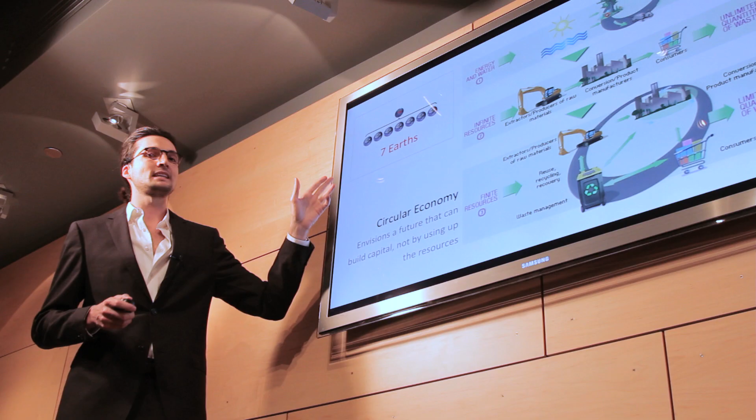Let me explain. We live in a linear economy where we take, we make, we use, and we dispose, creating a lot of waste at the end and taking a lot of natural resources. As a consequence of this model, we would need 7 planet Earths if the whole world were to consume at the same rate as America does today.

So a circular economy system is where things are reused or recycled, so they don't create waste, or at least they don't create as much waste, and in the same way take less resources.

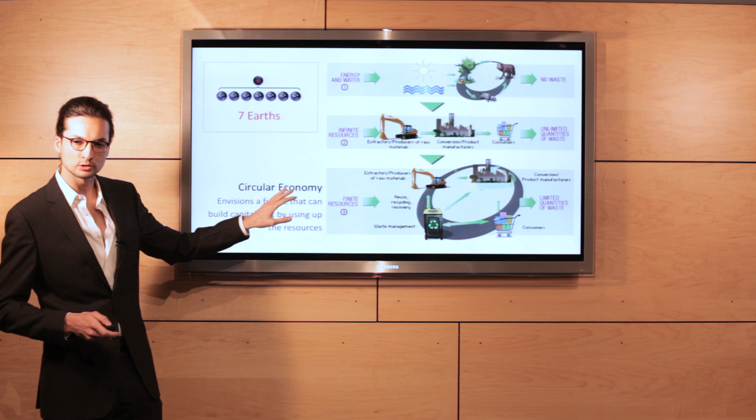A car today already has a high recyclability rate, where 85% of a car is already recyclable. But this is actually downcycled, meaning that every time the materials are recycled, they lose properties until someday they end up in a landfill. The steel out of these cars is not going to be good enough to be used in a car again. It's going to be used to make lower quality products.

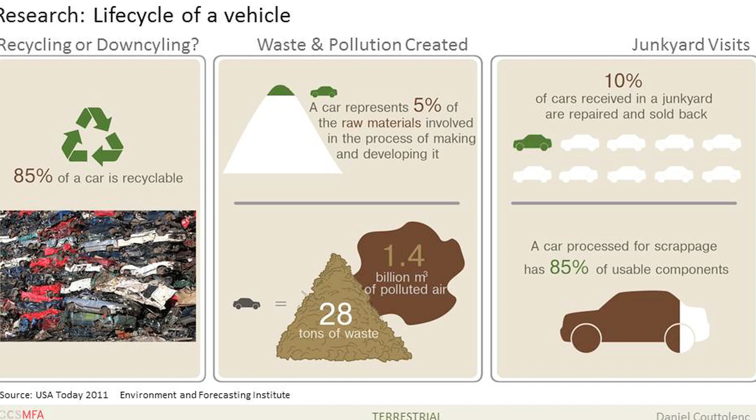Before a car is even put on the market, it has already created huge amounts of waste and pollution. A car represents only 5% of the raw materials involved in the process of making and developing it.

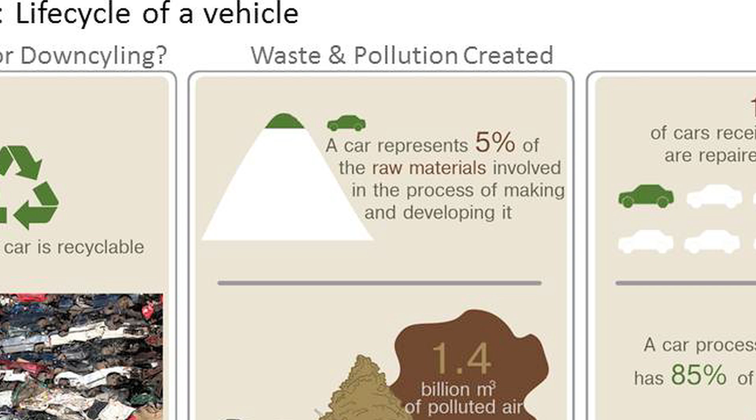To try and understand the end of life of a car, I visited junkyards, where I was impressed by the good condition of these cars. I had never been to a junkyard before, but I had this idea of super old and rusty cars.

But later I found out that 10% of the cars received in the junkyard are repaired and sold back, and out of the ones that stay, they have an average of 85% usable components. But because the car is designed as a whole, the whole car has to be processed for scrappage.

The segment I'm targeting is called the LOHAS, a rapidly growing demographic related to sustainable living. For them, the value of preserving the environment stands higher than the status or the tag price.

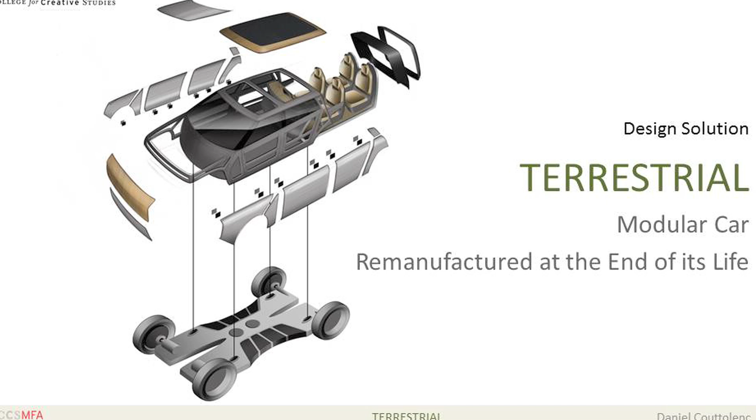My design solution is called Terrestrial. It is a modular car that is going to be remanufactured at the end of its life. My solution is not about the car itself, but about an opportunity to make a more sustainable life cycle.

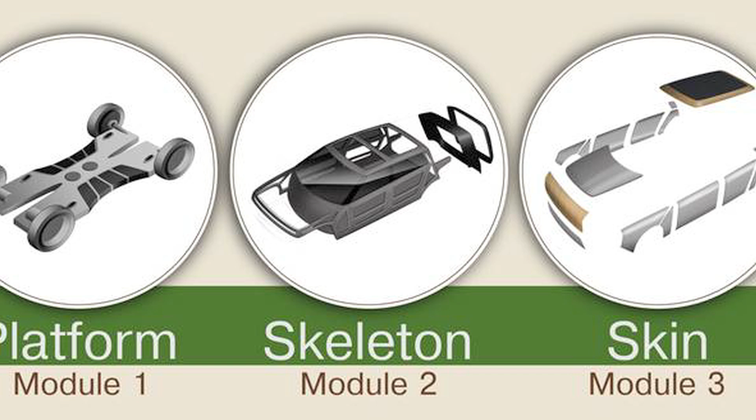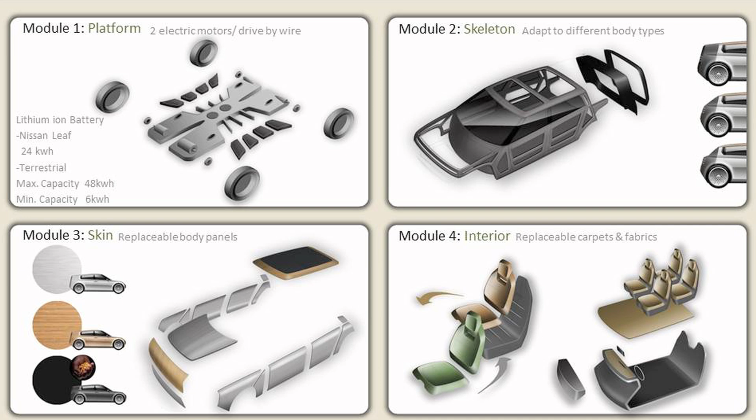Terrestrial is divided into 4 modules. The first module is a platform. The second is a skeleton. The third is the skin, which are the outer body panels, and the fourth is the interior. These 4 modules work independently from one another, being able to be repaired and upgraded to new designs and technologies separately, without limiting the lifespan of one another. Each of these 4 modules is subdivided into modules to maximize the lifespan of each component.

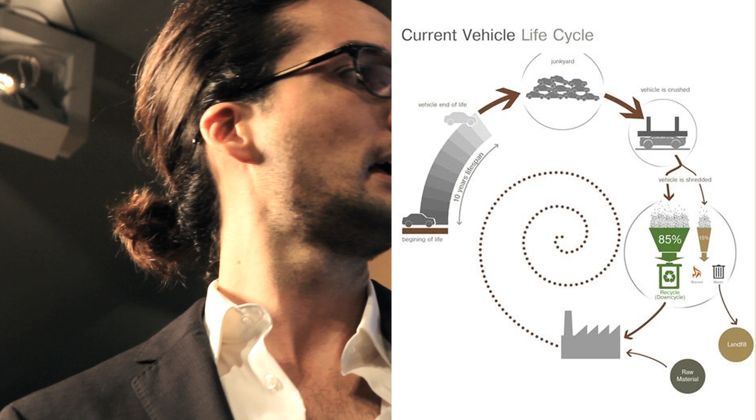This is how the current life cycle of a vehicle works, where at the end of the 10-year average lifespan of the car, it's sent to a junkyard where it's going to be crushed and shredded, and the recycled material, as I mentioned earlier, is not going to be good to use in a car again. So it goes in a spiral until someday it will end up in a landfill.

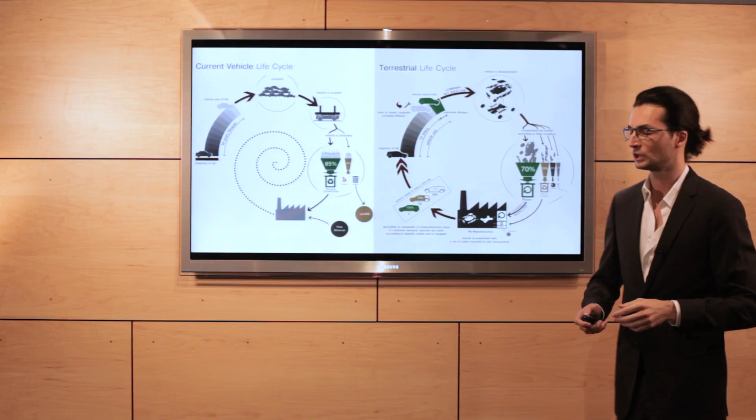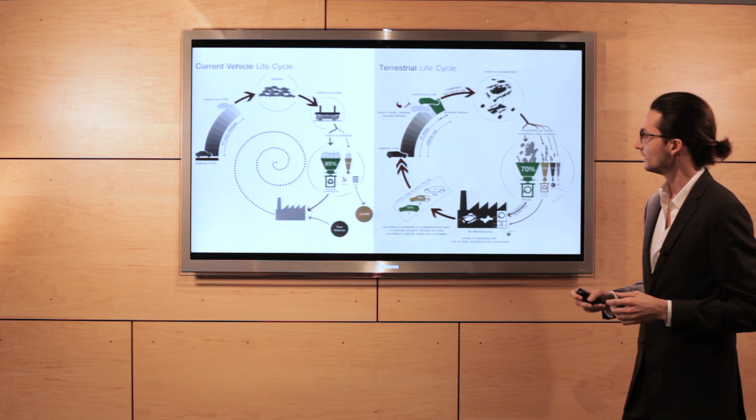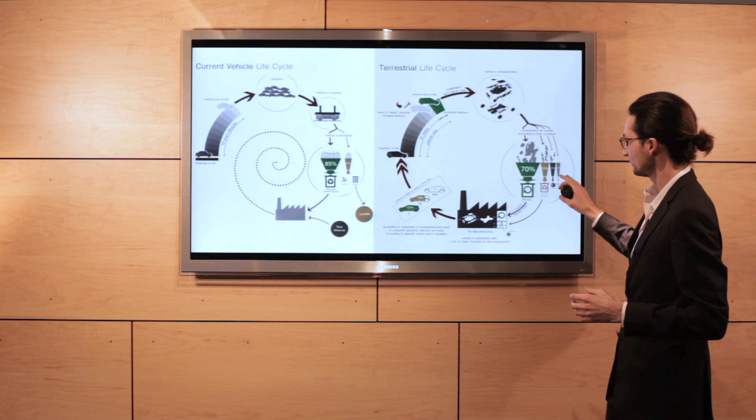This is how the proposed life cycle of terrestrial works, where because the car is designed modularly, it's easy to repair and upgrade, which will expand the lifespan of the car. After, when it finally reaches the end of its life, the company will buy back the car, where the car is going to be disassembled. 70% of components are going to be processed for remanufacturing, and cars are going to be assembled with these remanufactured components. This way, cars will have a second life.

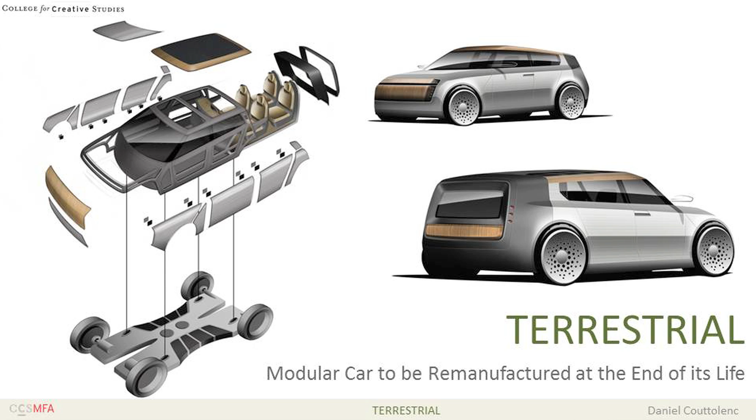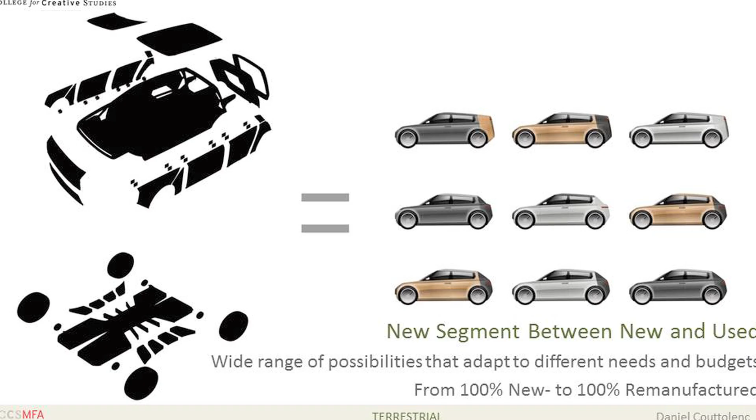This is an exploded view of the 4 modules and how it looks assembled. This will create a new segment between new and used cars, having the reliability of a new car but at a much lower price, having a wide range of possibilities that can adapt to different needs and budgets, having cars that are built with 100% new components and cars that are built with 100% remanufactured components, and all the possibilities in between.

The benefits of terrestrial are an increased lifespan, where in the typical car the average lifespan is 10 years, with terrestrial the average lifespan of components is 30 years, a reduction in waste and pollution up to 1/3, and a high residual value, because in a way the company will be selling several times the same component. At the end of their life, the car will have a high residual value, up to 30% of the initial purchase price.

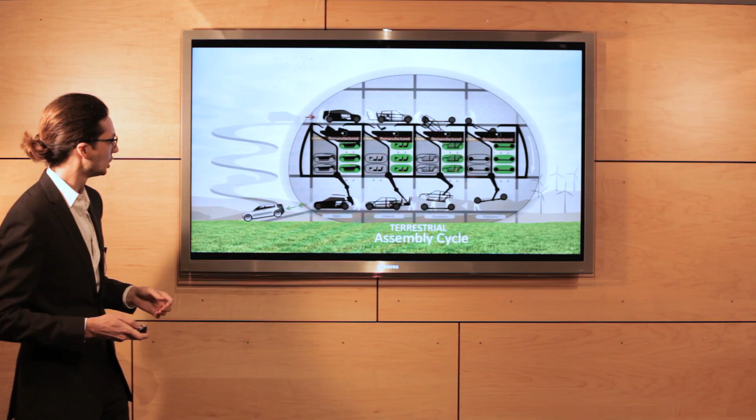So instead of being an assembly line, it's an assembly cycle, where the old car goes in, the cars are going to be disassembled, components are going to be processed for remanufacturing, and new cars are going to be assembled with remanufactured components.

That's the end of my presentation. Thank you.

The transportation design program, the MFA degree there, really takes further the undergraduate training, the rigor and the discipline that's applied at CCS, and takes it to the next level of strategic thinking, consumer research, and the business perspective. It's where design, business, as well as technology intersect.

Hi, my name is Shabtai Hirshberg, and before I present my thesis, I'd like to introduce myself. I was born in Israel, and I did my undergraduate in industrial design at Hadassah College in Jerusalem. After that, I worked for 2 years in a large plastic manufacturer called Keter. During my work there, I realized that I would like to have a larger and greater design impact, and I pursued this passion, and I came to study in the College for Creative Studies in transportation design.

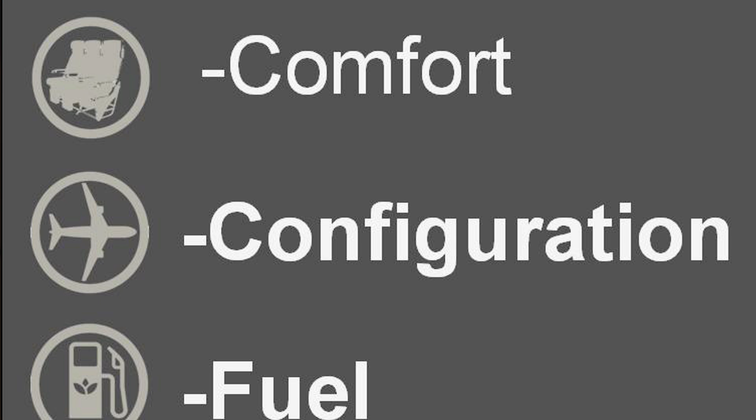My thesis topic is the redesign of a commercial aircraft. Looking at today's commercial aviation, there are 4 main concerns: the comfort of the passengers, the aircraft configuration, the fuel consumption, and the hub capacity. Looking at today, there's not much comfort on the aircrafts. Airlines scored lowest among 47 industries according to the evaluation of the American Customer Satisfaction Index. Configuration: looking at the structure of the aircraft today, it has been the same and consistent with the tube and wing configuration ever since. Fuel consumption:

Everyone is aware today of the rise in fuel prices and the gas we need to pay. But looking further to the forecast, things don't get much better. Prices are continuing to rise, and by 2030 they're expected to reach an average of $120 per barrel.

So let's see some of the airline industry's answers to this topic. They're restricting baggage. Airlines are flying slower to conserve fuel.

They're coming up with new seats so they can seat more people in the aircraft. Some airlines are completely replacing the seats inside the aircraft with narrower seats. And next is coming up bathrooms where you need to pay to use them.

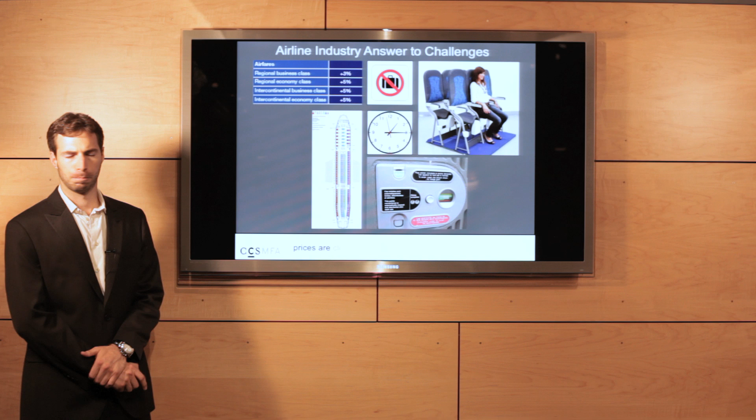Hub capacity. Everyone knows today the huge traffic and the delays, but things aren't getting much better. With the growth of the global middle class and the rise of world GDP, flights and air traffic are expected to double in size by 2030. So this is what hub capacity might look like in 2030.

So, looking at future designs, we can see that not much is done to approach this issue, mainly focusing on fuel and air efficiency.

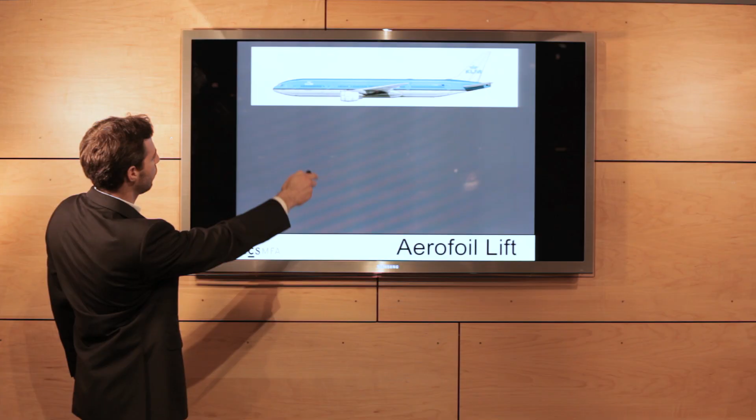Incorporating all my research, I came up with a new design. As you can see, it has a unique and different fuselage shape. Stepping back a moment, if we're looking at a traditional aircraft and the tube-and-wings configuration, the way it works is the fuselage is dragging the aircraft down and the wing is creating the lift.

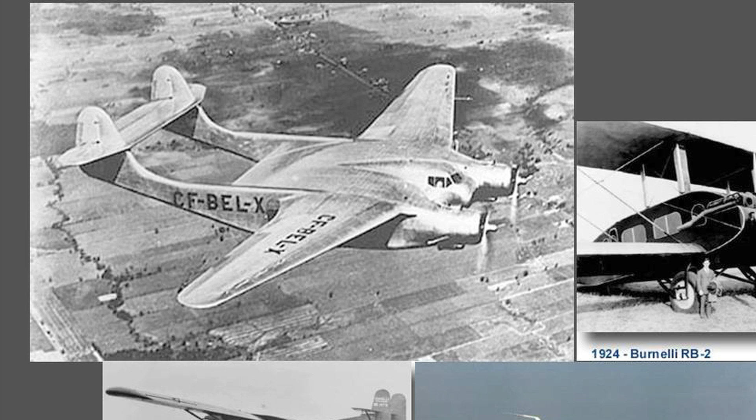In the new aircraft, you have the fuselage shaped as an aerofoil. So instead of having the fuselage dragging the aircraft down, as in the old aircraft, the fuselage is actually contributing to the general lift of the aircraft. This has been exploited before in a couple of older versions, and this provides us with a whole new range of opportunities.

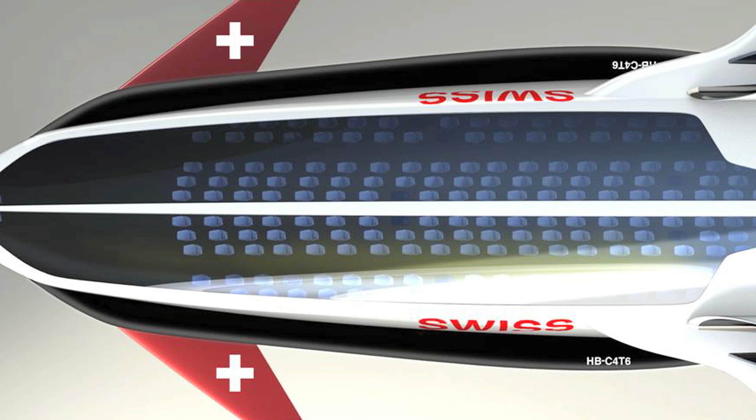Looking at the aircraft from the top, you can notice that it's much wider as a result of the lifting body, and this provides a much wider seating opportunity, so there's much more leg room and space to sit inside the aircraft. This is what the aircraft might look like from inside.

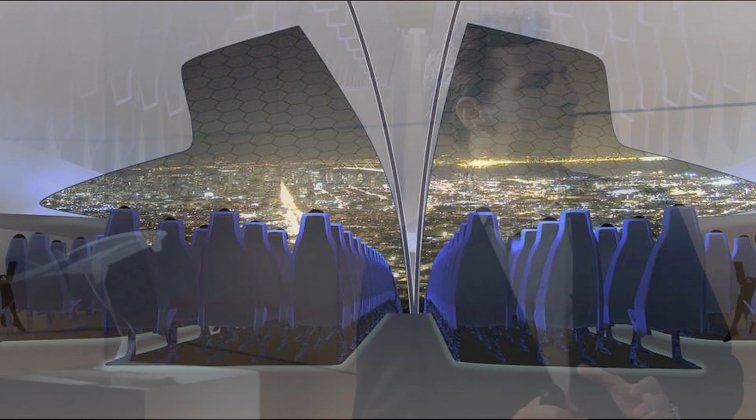And this is when it comes in for landing. So looking at the section of this aircraft, you can see there's a wide passage for entering the aircraft, the jetway, and then the seating design is more of a stadium seating. Every seat is just a little bit higher than the seat in front of it, so everyone has a window basically to view out.

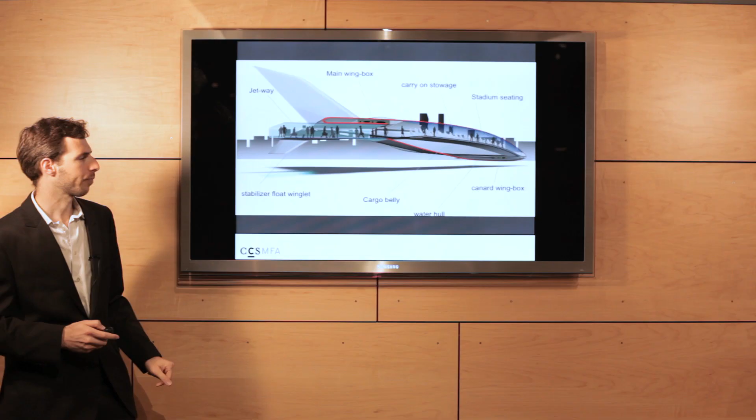In today's aircraft, when you're boarding, everyone gets stuck in the bottleneck. In the new design, it would be more flowing, sort of like when you board a ferry. So this is what it looks like boarding an aircraft today, getting stuck in the bottleneck, and this is what it would be like in the new design.

The aircraft has a hybrid engine which provides quieter, cleaner, and more efficient flight. This will enable aircrafts to fly and take off from airports that today are closed for night flight.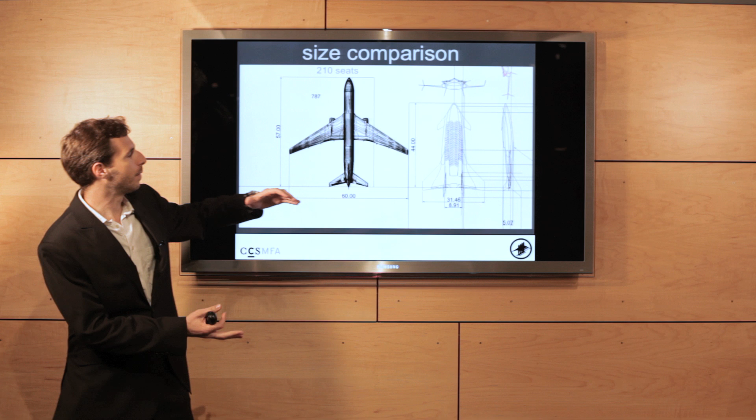Another addition is the size of the aircraft. The size of aircraft today restricts them from landing in small airfields because the aircraft needs such large wings to create lift. Comparing to aircraft today that are so much larger, this aircraft has the same amount of passengers but a much smaller size, which will enable it to utilize small airfields that today cannot be used.

Finally, further looking into the future, these are the large major airport cities, and most of them are located on large bodies of water, which will enable us to utilize water landing in addition to traditional airport landing. So this is what it might look like, air docks based on the edge of the cities.

This solution of landing on water is also very useful when retrofitting large cities with airports. Instead of having to build the airport an hour or so drive outside of the city, it could be easily retrofitted and built as a dock right outside the city, which would provide much shorter access time into the city.